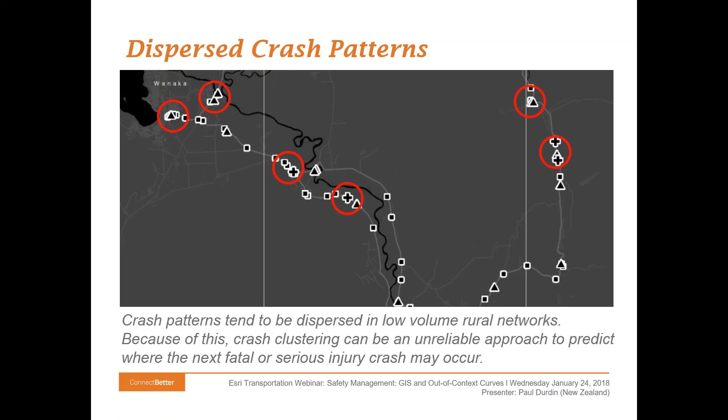The majority of horizontal curve assessment methods are manual, which means that they are very time intensive and can rarely be applied at a network level, simply because there are thousands upon millions of curves in any given network.

This is supported by NCHRP Report 500, a guide to reduce collisions. Part of the introduction there that I'd like to draw your attention to, it does say that there are typically no formal means of reviewing all horizontal curves and identifying those with adverse safety performance.

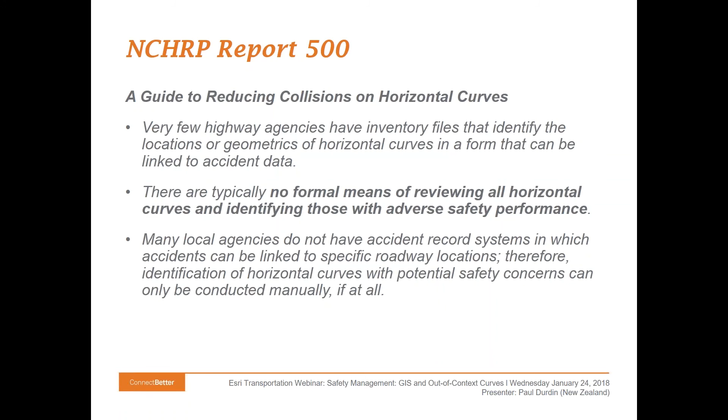The absence of a network level screening tool to assess the safety of all horizontal curves across a network leads practitioners to work from assumptions that may be erroneous.

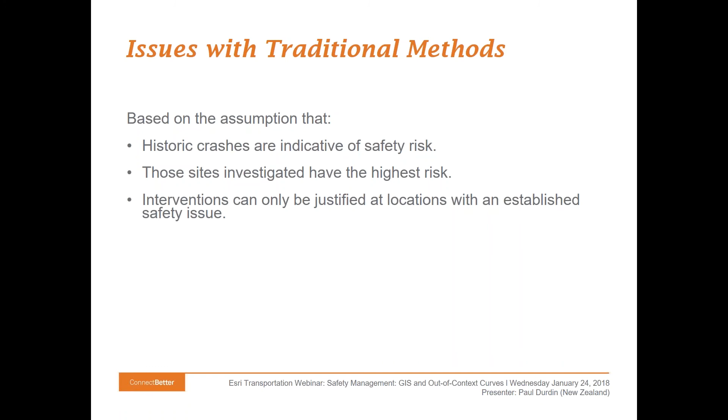Some of these assumptions include that crashes are indicative of underlying safety risk. Well, we know that this is not true, particularly in low volume networks. That the locations investigated are the least safe parts of the network. Well, how can that be known without a network assessment? And that interventions can only be justified at locations with an established safety issue.

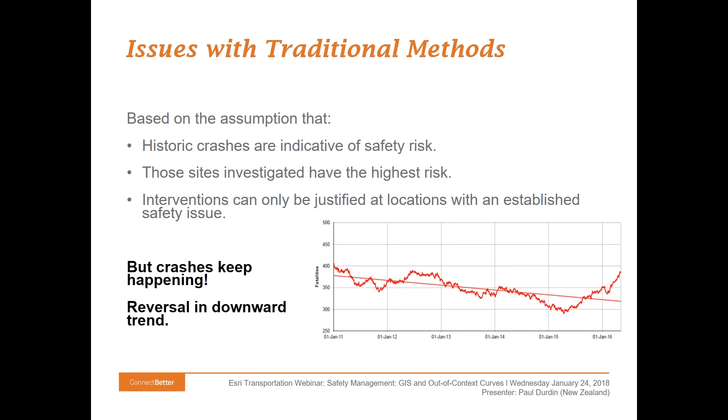But we still have crashes that keep happening, and the United States, as well as many other parts of the developed world, are experiencing an upward trend in roadway fatalities over the last 2 to 3 years as economic conditions have reinvigorated. So there is a large challenge before us.

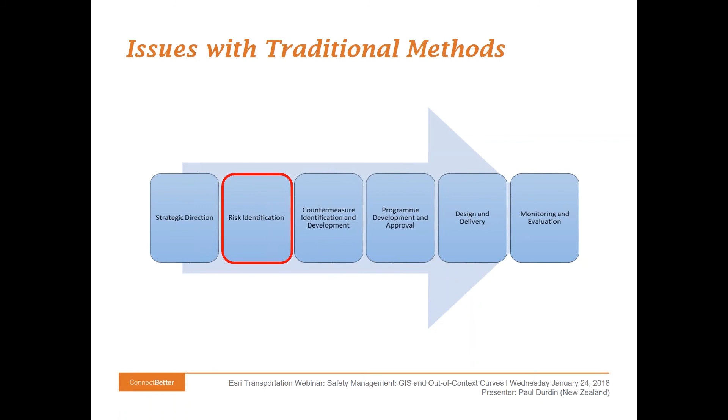These assumptions typically occur in the risk identification stage of the overall life cycle of a typical road safety program. So what happens if the assumptions around the risk phase are wrong?

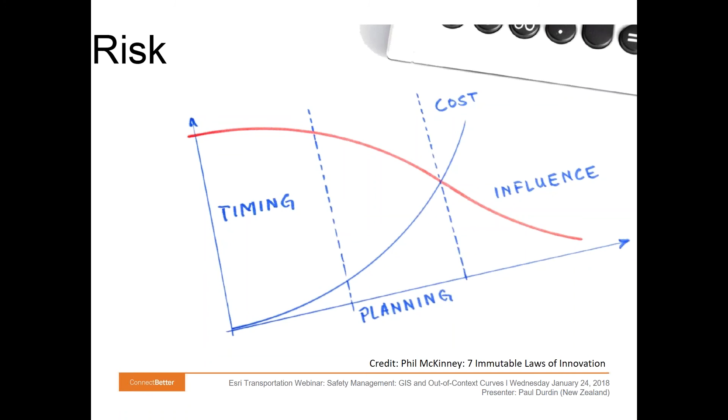I like this very simplistic chart here, which shows the importance of making correct assumptions at the start of the process, giving you the greatest opportunity to influence a positive outcome. The further down the track you get, the least influence you have, plus also the cost of rectifying the assumptions increases as you get down the track. So getting the assumptions right at the risk identification phase is critically important.

So let me tell you a little bit about the evolution of that horizontal curve risk assessment tool that we've developed here in New Zealand.

New Zealand's road safety strategy for the current decade is called Safer Journeys. It adopts the safe system approach to road safety and has a vision of a safe road system increasingly free of death and serious injury.

As part of Safer Journeys, it identifies signature projects, which are exemplar projects that adopt a complete safe system approach to road safety. Signature projects provide a platform for trialling innovative approaches and treatments across the four safe system pillars.

The Eastern Bay of Plenty region of New Zealand was identified as an area where a signature project could make a demonstrable advance in reducing road trauma for all road users. The New Zealand Transport Agency commissioned a multifaceted signature project in this region.

One of the work streams involved developing a methodology that would allow road safety risk to be better understood at a network level, especially at horizontal curves, which was the location of 58% of all injury crashes in the region. An objective of the signature project was to develop a risk prediction model that allowed horizontal curve risks to be understood at a network level, preferably without the need for any manual data collection.

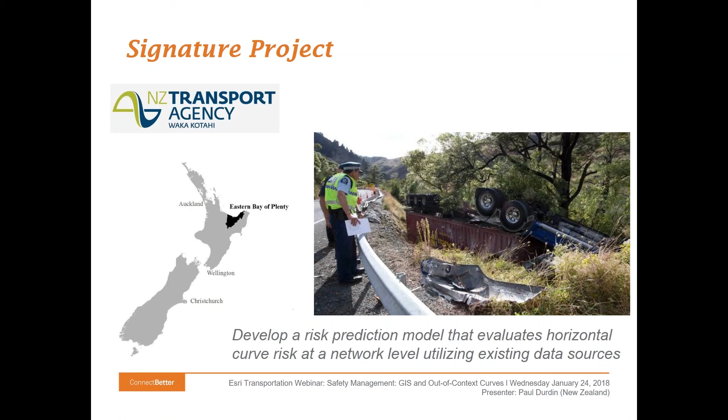The challenge put to us by the New Zealand Transport Agency asked us to reconsider the traditional ways of thinking about safety on road networks. It essentially asked us if we could understand road safety risk at a network level, and provide data-driven, evidence-based analytics to support policy and investment decision-making.

Move away from a reactive to a proactive approach to assess road safety, identify a technique that targets high-risk locations, take existing data held by road authorities and other agencies and add value to it, and avoid the need for expensive and time-intensive data collection or field assessment.

After an extensive literature review, the process selected as the suitable basis of the project was the Austroads operating speed model. The operating speed model sets out a procedure for calculating speeds along road sections based on the geometric features of the road and typical behaviours of drivers on higher speed roads.

The model was based on three primary elements: the driver, the road, and the vehicle. It is developed on the premise that driver behaviour approaching, traversing, and exiting a curve is a function of the preceding geometry, the approach speed, curve radii, and length of straight immediately following a curve.

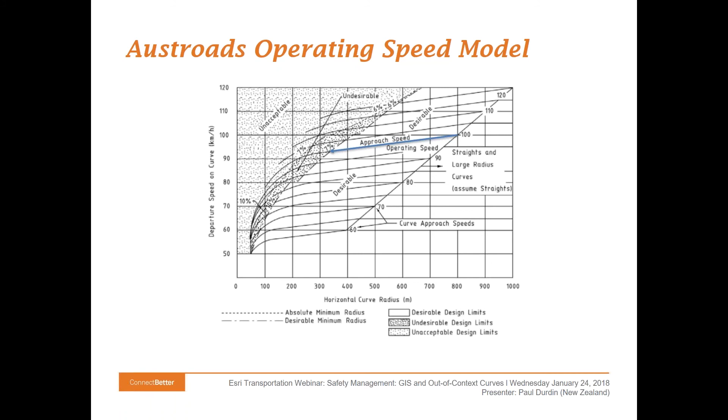The input data required for the assessment is a high-quality centerline that accurately reflects the geometry of the road, speed limit information, and a digital elevation or terrain model.

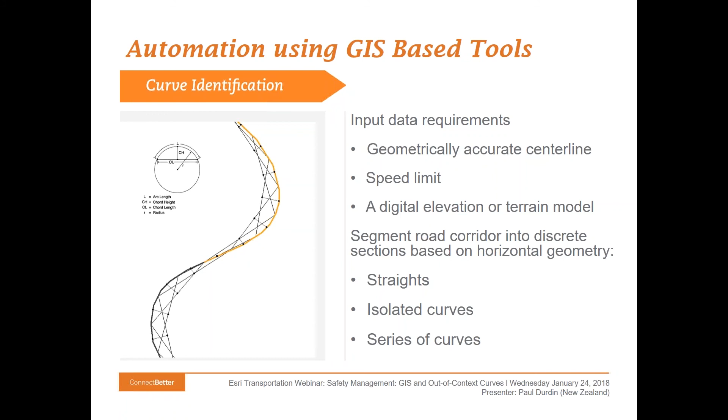Road corridors are then segmented into discrete sections defined by horizontal geometry and demarcated by the start and end points of straights, isolated curves, or a series of closely spaced curves with similar radii.

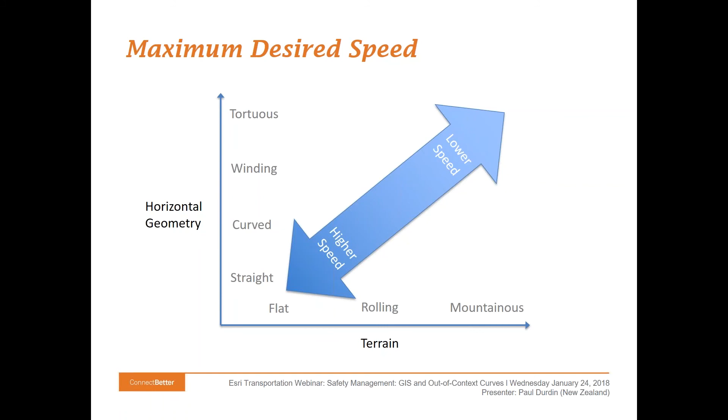Maximum desired speeds for each segment are calculated as a function of the speed limit, terrain, and curvature of the road. This figure shows that as terrain and geometry becomes straighter and flatter, speeds are higher compared to mountainous and tortuous alignments where speeds are lower.

Next, operating speeds are calculated along the road centerline in both directions. Operating speeds are calculated by running a Python script that sequentially evaluates each element of the road, curve or straight, to model vehicle speeds and driver behaviour.

In simplistic terms, motorists are modelled to accelerate when straights are longer than 200 metres, to maintain speed where straights between curves are less than 200 metres long, and to decelerate where the approach speed is higher than the operating speed range for a curve or series of curves.

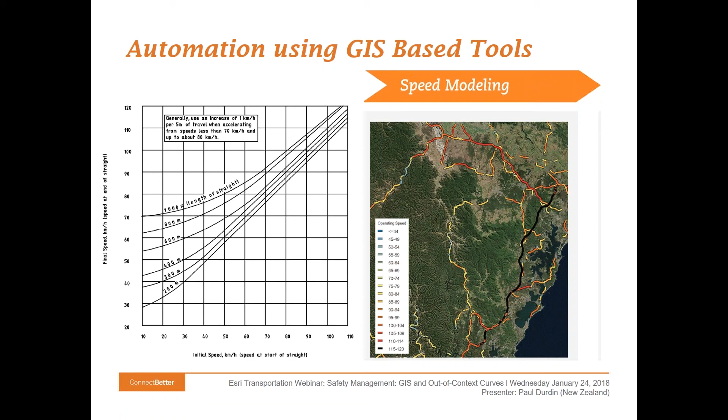Curves are then classified based on the relationship between modelled curve approach speed, horizontal curve radius, and modelled curve departure speed. Curves are classified as being unacceptable or undesirable, and these are referred to as out-of-context curves.

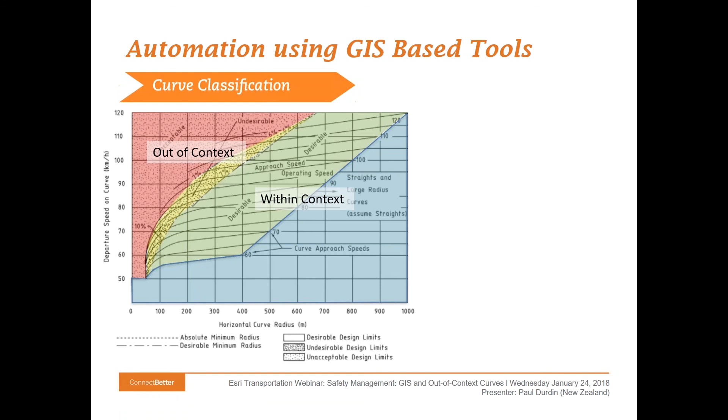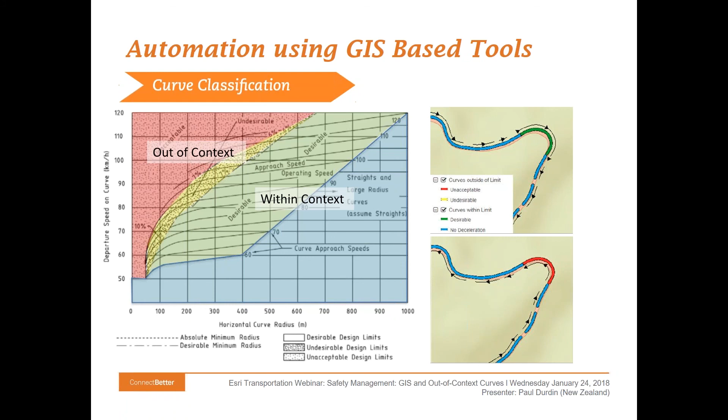Or within limit or desirable, and these are referred to as within context curves. On the right, you can see that the curve analysis is carried out bidirectionally, so that curves may have different curve contexts in one direction compared to another.

Results show that curve-related crashes, such as roadway departure and head-on crashes, are significantly overrepresented on the out-of-context curves compared with curves that are within context.

However, more than 50% of curve-related crashes occur on the unacceptable and undesirable parts of the network.

This technique has been extended to the New South Wales and Queensland states of Australia, and now we've assessed more than 70,000 miles of roadway of state and local government roads, and we find a similar relationship holds true in all of these areas.

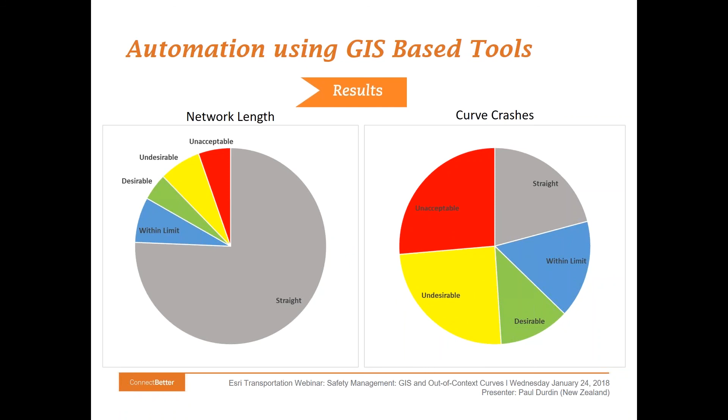Although regional variations are noticeable. At a network level, injury crash rates on out-of-context curves are 450% higher than straights and nearly 100% more than curves that are within context.

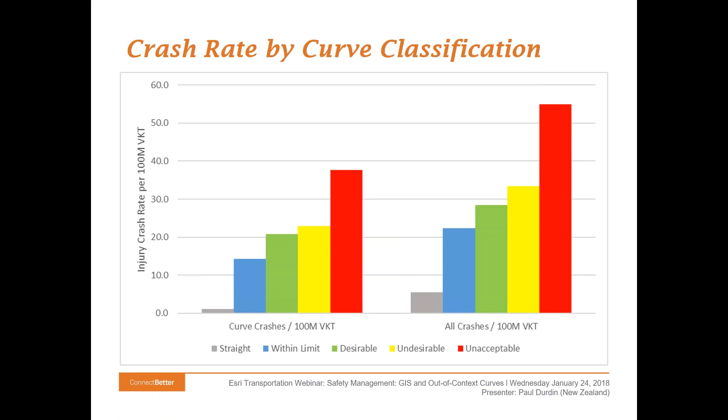The disparity is especially pronounced at unacceptable out-of-context curves. This demonstrates that out-of-context curves are locations of heightened risk per road user compared to curves that are within context, and significantly heightened risk compared to straight sections of road.

Take, for instance, a curve negotiation speed of 65 kilometres an hour. So that's equivalent to 40 miles per hour.

If the improvement project was delivered to a within context curve. So the key point here is that curve classification is really critical for generating higher levels of improvement.

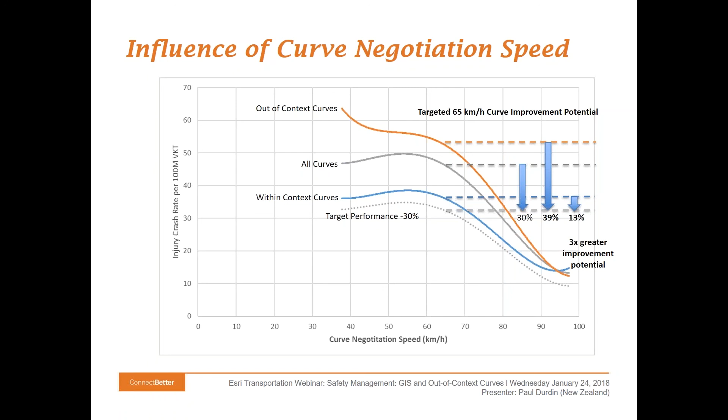More than 3 times the level of improvement is likely to be achieved for delivering an improvement project to an out of context curve compared to a within context curve.

So you may be asking, is there an inherent risk at horizontal curves that cannot be reduced by engineering interventions? The answer is no. A good way of demonstrating this is to look at the crash rate as a function of functional classification of roads.

The dotted lines show the national average for curve-related crashes and all crashes in New Zealand. And we can see that the highest classification of roads, the national strategic and regional strategic roads, have crash rates.

That are below the national average for out-of-context curves. However, as the category functional classification lowers, we find that the crash rate extends above the national average.

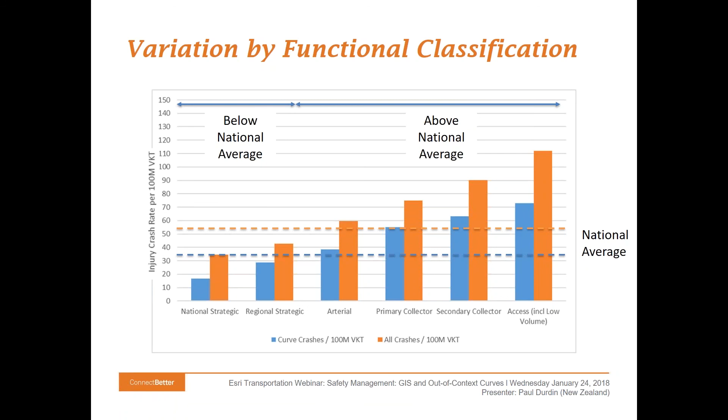And this is not surprising, as more resources are thrown at the highest order roads to create safer environments, whereas roads' functional classification reduces, so too does the level of resource allocated to reduce road trauma.

However, we have a narrower shoulder, but the roadside hazards are quite a long way back from the road. As the roadway reduces in status to a primary collector, we find that the.

Delineation tends to reduce, and we have roadside hazards entering into the clear zone. And on secondary collector, we often lose edge marking lines, and in this instance we can see a utility pole.

Placed on the inside of a curve, which would prove to be a very severe hazard if a vehicle departed the roadway in that location.

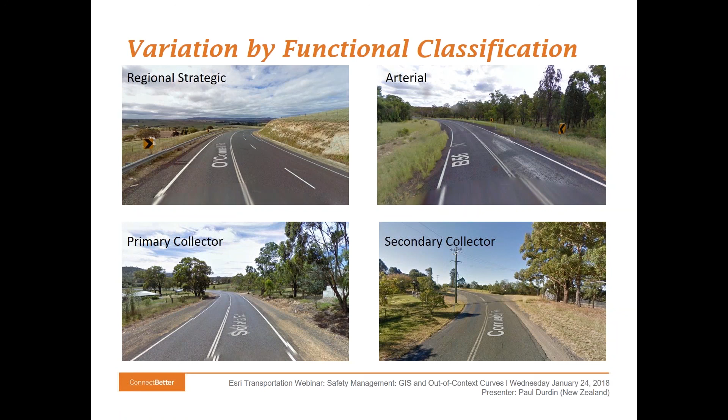The horizontal curve analyses are being used by road controlling authorities in New Zealand and Australia for a number of reasons, and I will touch on these later. But in simplistic terms, they're being used to prioritise corridors for mass action highway improvement programs, to evaluate the benefit of speed management interventions, and to provide an evidential basis for funding applications.

I'll now take you to one of the web viewers that we have developed for Transport for New South Wales. That should be on your screen now. New South Wales is a very large state in Australia, and it contains 42,000 kilometres, or 26,000 miles, of state-controlled rural roads.

This screen here shows the first stage of the modelling process, which is the calculation of operating speeds at a segment level. You can see here that as alignment becomes more tortuous, operating speeds reduce, such as in this area. As alignment is higher, straighter, we have higher operating speeds.

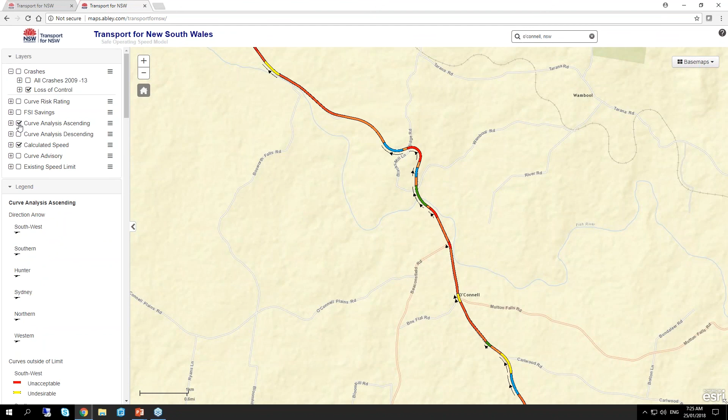If I then take you to a specific example, when we run the curve analysis, we see here that in the ascending direction, from south to north, we have different curve classifications along the corridor. The red and yellow are our out-of-context curves, and the blue and green are the within-context curves. This varies by direction.

If you look at these curves at the top here, you will see that the first curve encountered from north to south is out of context because it follows the end of a straightish section of road where operating speeds are higher. But in the other direction, it is within context because the user has just traveled through a tight curve, meaning their approach speed into that next tight curve is within context of that curve.

So how does this curve analysis correlate with crashes on the network? I can bring those up. Just waiting for those to load. Right, that should be there now.

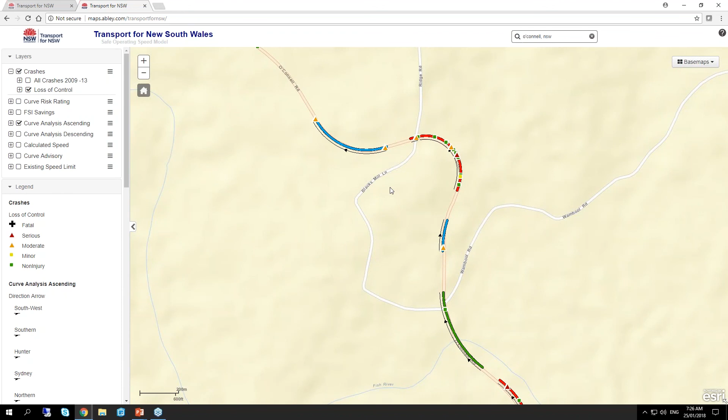We can see that curve crashes tend to be very closely correlated with the curves of greatest risk. So even as we pan out and see what might appear to be an innocuous curve at the southern end of this section, there have been loss of control crashes there. It doesn't mean that there won't be crashes on the within-context curves. It's simply that the crash rate on the out-of-context curves is a very heightened area of risk.

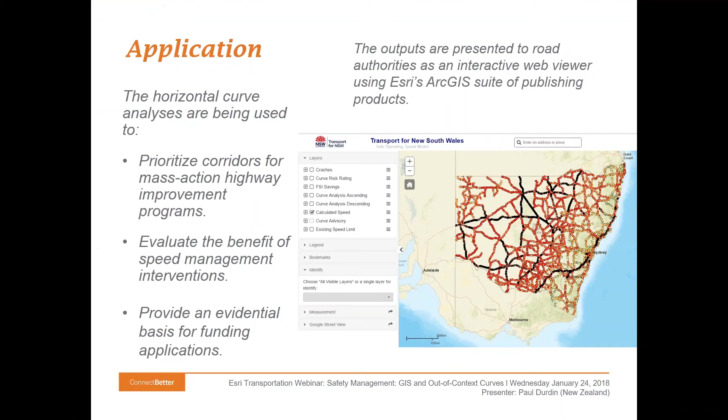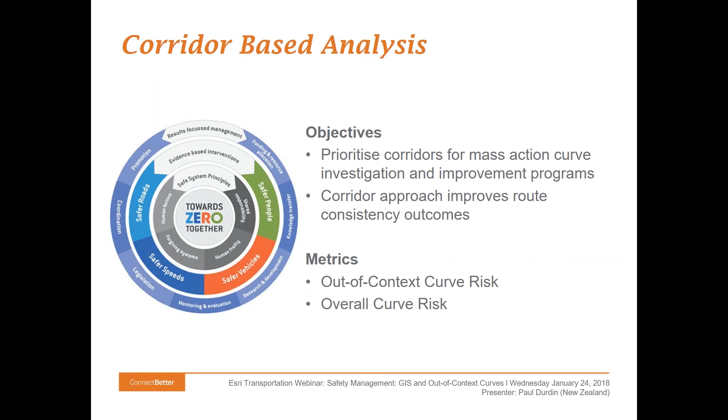So if I return to a couple of the specific examples of how the analysis has since been taken further, one of those is a corridor-based analysis technique, which has an objective to prioritise corridors for mass action curve investigation and improvement programs and to improve route consistency for road users. One way of doing that is to create additional metrics that prioritise curves. We've developed two metrics: one is an out-of-context curve risk, and the other is an overall curve risk.

The out-of-context curve risk measures the number of injury crashes occurring on out-of-context curves per out-of-context curve along the corridor. It's developed as a proxy for the number of crashes that can be targeted if out-of-context curves along the corridor are improved to an appropriate standard.

The other metric, overall curve risk, measures the number of injury crashes occurring on all curves, normalised for traffic volume. This is designed to filter out corridors that have a high number of crashes relative to the number of curves, but a low crash rate per vehicle traversing the corridor.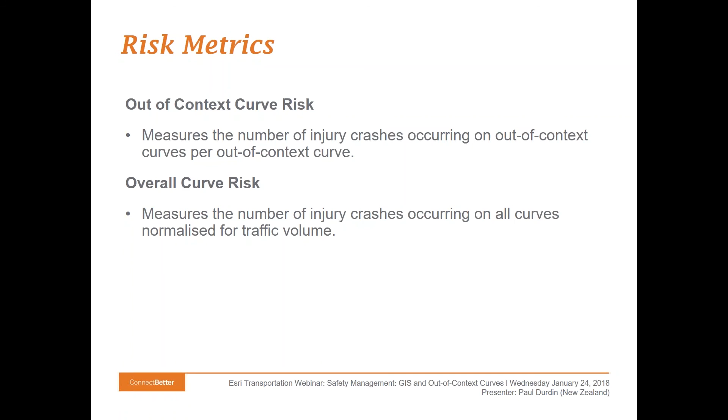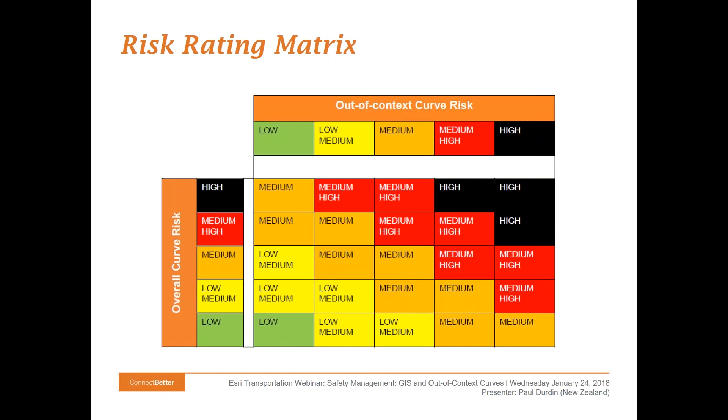Low crash rates indicate that safety improvements may not yield as much safety benefit when compared to corridors with higher crash rates. A simple risk matrix is developed so that highest risk corridors are identified only from those corridors that have high risk ratings under both metrics.

Now, for each jurisdiction, we work with the road controlling authority to set thresholds and identify suitable target lengths of network to fall into each of these categories.

So for the Centre for Road Safety at Transport for New South Wales, they wanted around 10% of their network to fall into the high risk band, with progressively higher proportions of network falling into each of the subsequent lower risk bands. And this can be adjusted depending on the appetite, budget and level of investment that the road controlling authority may want to deliver.

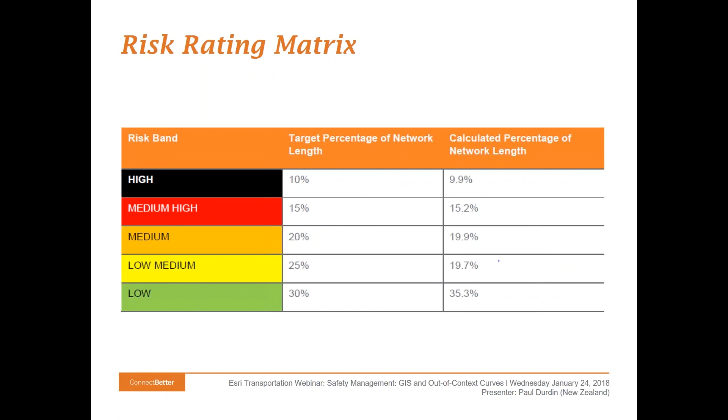So for New South Wales, 10% of the network that was analysed represents around 2,600 miles of network. And as you can see, the calculated percentages align very closely with the target lengths. So what do these results look like?

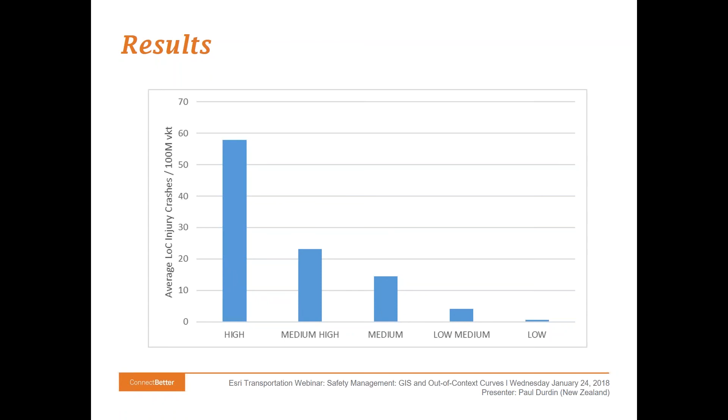Well, when we start to analyse the results at a crash rate level, at a corridor level, we can see that the highest risk corridors have a crash rate that is 2.5 times that of the second highest risk category. And this is a really critical finding because it means that efforts can be targeted to risk, thus optimising investment and saving lives if we focus on these highest risk corridors.

If I return to the web viewer, we can bring up the curve risk ratings underneath. Bear with me as I zoom out. And we can see how the risk levels look at a corridor level across the network.

So the intention here is that for the Centre for Road Safety Transport for New South Wales, they will be focusing their high-speed horizontal curve investigation and improvement programs on the corridors that are high risk, coloured black, and then progress on to the red corridors and potentially the orange coloured medium risk corridors. And that way they'll know that they're addressing corridors where the crash risk per horizontal curve and along that corridor really has an opportunity to deliver those demonstrable benefits to road safety.

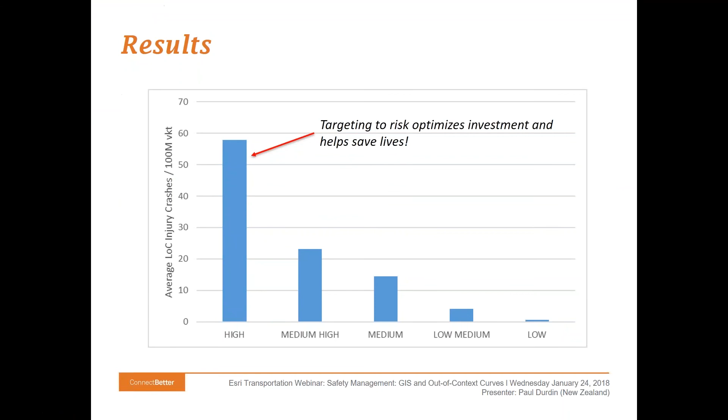Another of the applications that is being used is speed management. And an objective here is to set speed limits that are safe and appropriate for the function, use and risk of each road. And the metric used here is the Nilsson's power model.

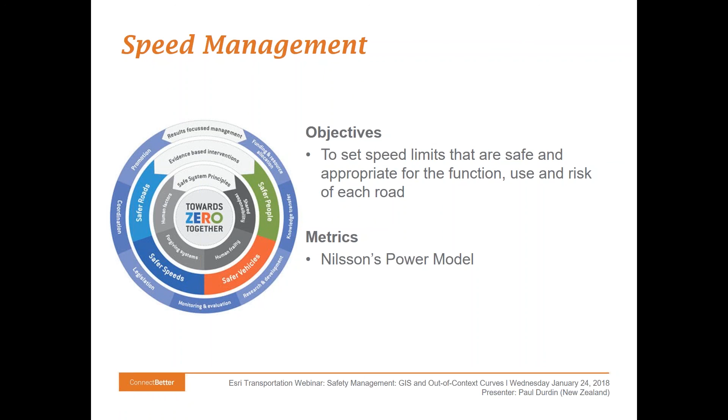So Nilsson's power model says that changes in speed are directly correlated to safety outcomes. And there is a formula where it says estimated DSI, and DSI stands for death and serious injuries, is a function of the current estimated DSI multiplied by a speed change ratio to the power of an exponent.

So what we did is we modelled different speed limit scenarios across the network, and then we're able to assess the relative benefits that could be yielded on a corridor by corridor basis if speed limits were changed.

On average, we found that a reduction in speed limit from 100 kilometres per hour, so 60 miles per hour, to 80 kilometres per hour, that's 50 miles per hour, will yield approximately a 27% reduction in deaths and serious injuries.

So having access to this information helps road agencies demonstrate that a speed limit reduction has the potential to deliver road safety benefits. The operating speed model allows these agencies to set and test different speed limit scenarios, therefore helping them understand the potential impact on road safety outcomes as well as travel times and operating speeds. And they can assess the impact of different speed limits on the number of out-of-context curves along each corridor.

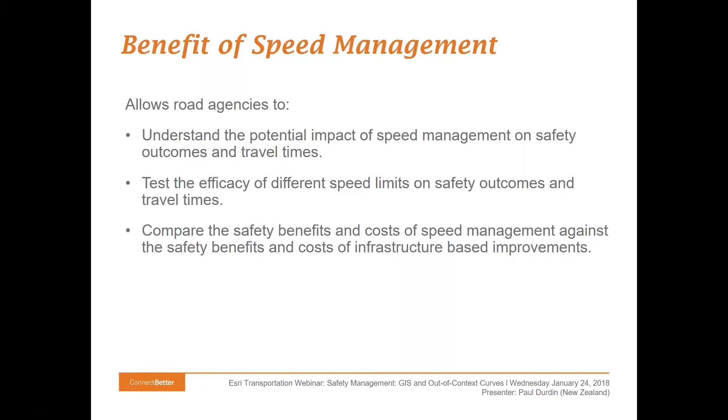So what are the key messages that I'd like to reiterate today? Well, one of those is that this bridges a gap between an awareness of a major safety issue, that is crashes at horizontal curves, and detailed strategies to reduce the likelihood and consequence of crashes.

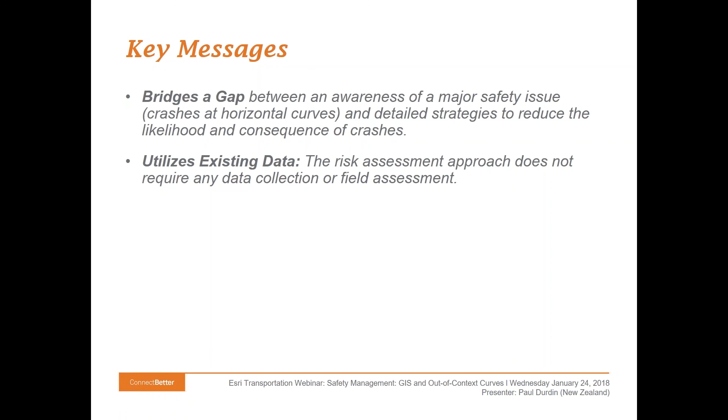It really provides a technique to ensure that the risk identification stage is done at a network level. The process uses existing data. It does not require any data collection or field assessment, so it is available to all road controlling authorities. The risk assessment approach is independent of historic crash data, which makes it proactive and a better method, particularly on low volume networks, to understand risk and predict where the next high severity crash is likely to happen.

This then means that investment can be optimized, and it provides an evidential basis for targeted road safety investment. And ultimately, what we all want to achieve is to save more lives. So targeting improvements at out of context curves and on high risk horizontal curve corridors will save more lives than improvements delivered independent of curve classification.

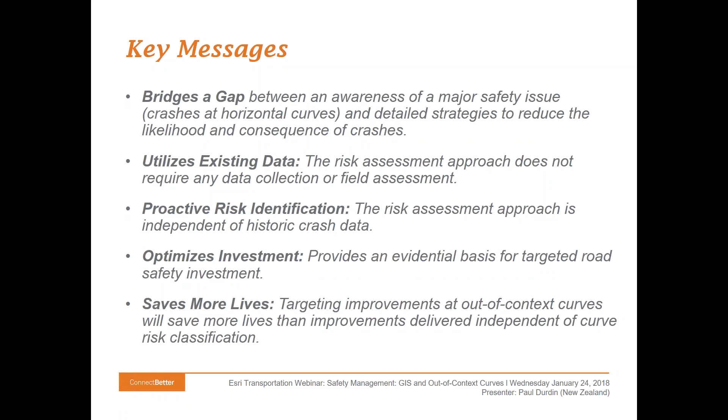Thank you very much for your time today, and I'll hand the presentation back to Terry.